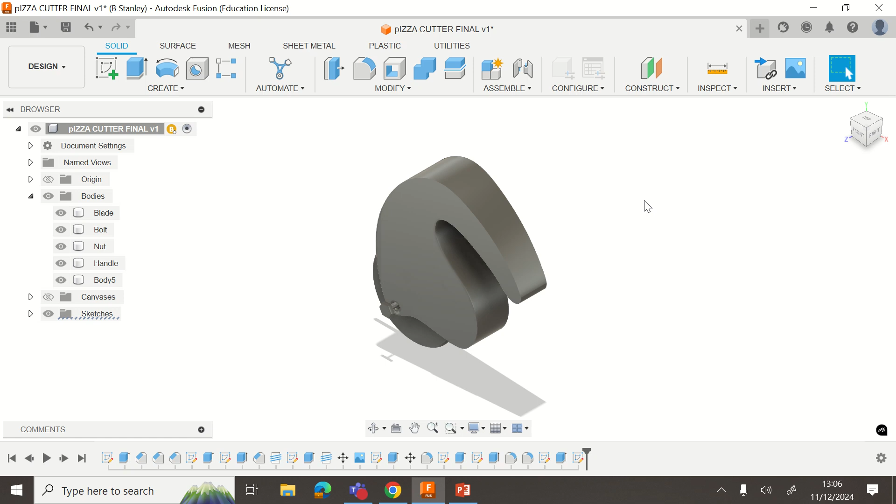In this video I'm going to show you how to insert a gap for the blade to be able to rotate round, as well as a technical drawing, exploded view and a render to the product.

As you can see at the minute, the blade would not rotate as it's inserted into the actual body. There's no gap like on our prototypes that would allow it to rotate round.

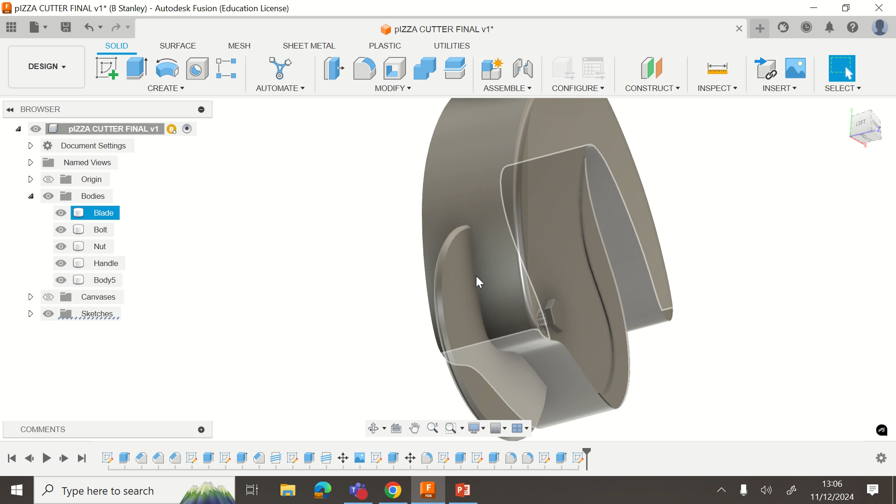So in order to create a gap, I'm going to click the front view, selecting that in the top right hand corner. Then I'm going to click create sketch, and select the surface I want to sketch onto.

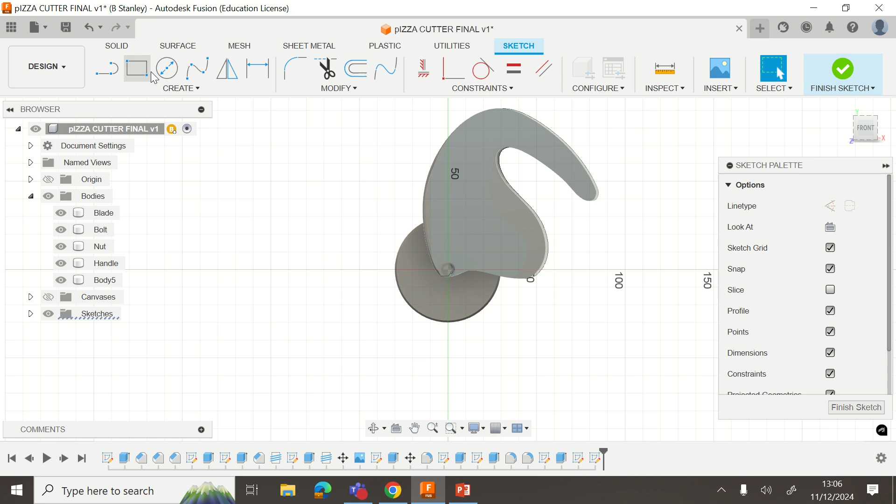With the circle tool, which either shows here or under create as circle, center diameter circle, you're going to select that middle section, shown by a target in the middle. I'm then going to select that, and make it slightly bigger than the blade.

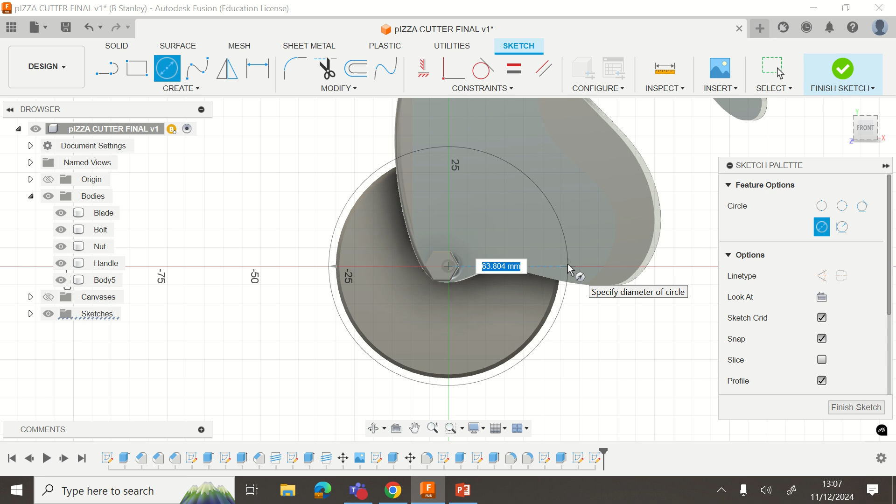It needs to be slightly bigger so that the blade can obviously rotate around it. So I'm going to click there, then click finish sketch, and return to a 3D view by clicking on the house at the top right.

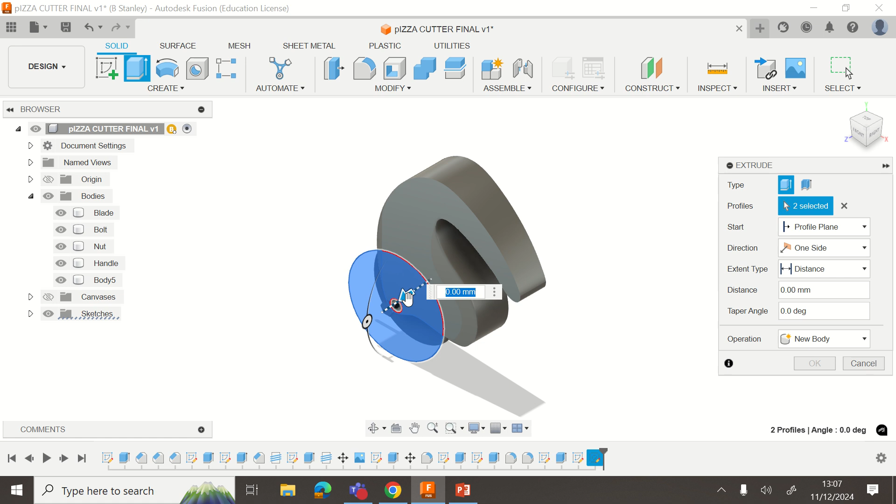Now I'm going to extrude this shape, so I'm going to click it, and click extrude at the top left. You'll notice that when I push through, it cuts everything out, and I don't actually want to do that.

I just want to cut part of the shape where the blade is. So I'm going to change this to two-sided view, so I've got control of both sides, so I can make this bigger or smaller.

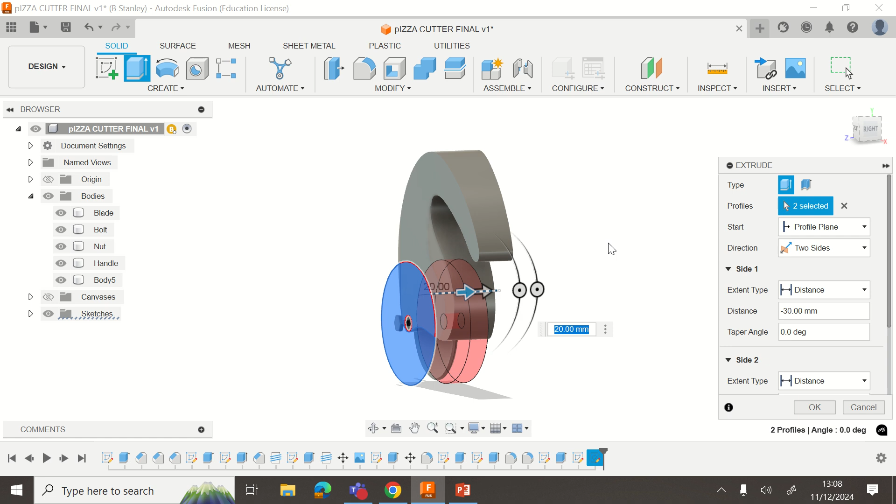You'll also notice that it's actually removed the blade. It thinks that we want to cut the blade as well, where we don't want to cut the blade, we literally just want to cut the body.

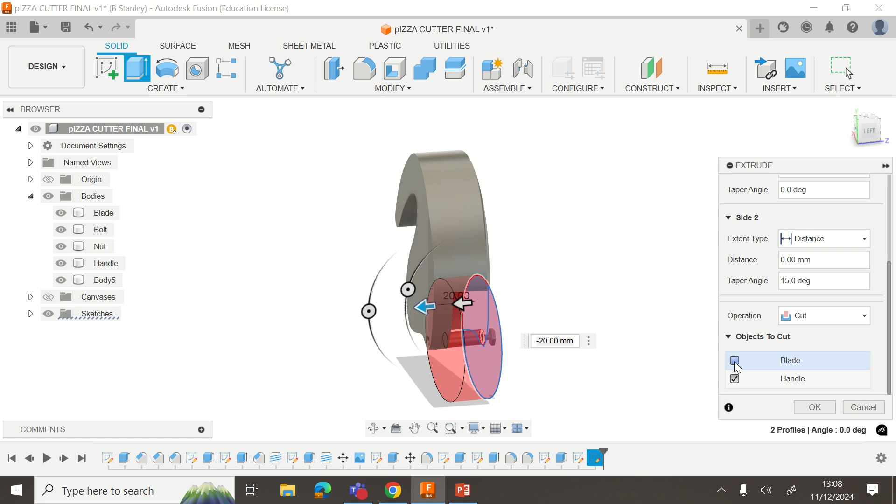So if you scroll down here, it will say objects to cut, and you don't want to select the blade, so you want to turn the blade off. You literally just want the handle to be ticked, meaning the handle is the only thing it will cut through.

Now I can adjust this so that there is a gap big enough, and you can see from the red markings roughly that there's a gap so the blade can rotate round. And then I'm going to click OK.

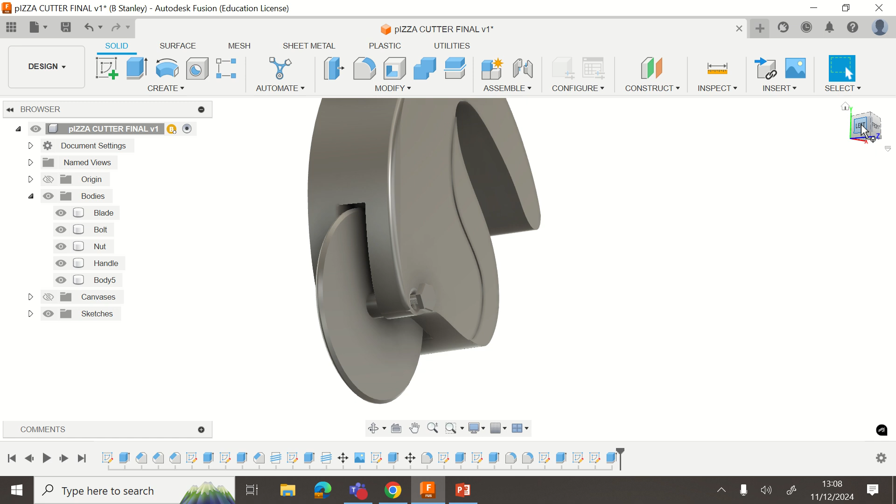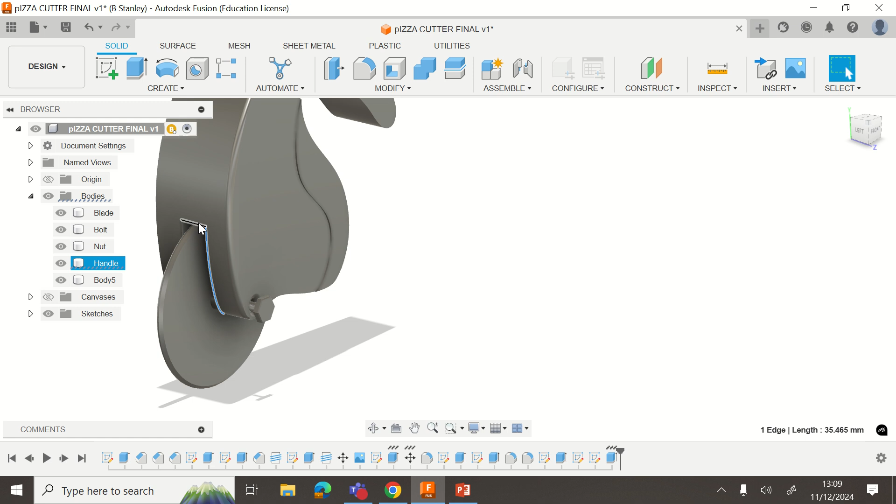Now you'll also notice that there is this section here which we can remove later on, so don't worry about that at this point. Now if you wanted to go in and fillet these edges to make them slightly more curved, you can do that, or you can just leave as is.

The next step is, as you can see here, I've got this rubber kind of grip that I'll add later on, and I also want to add the same onto the other side. So I'm going to turn the canvas back on, and flip it round to the other side.

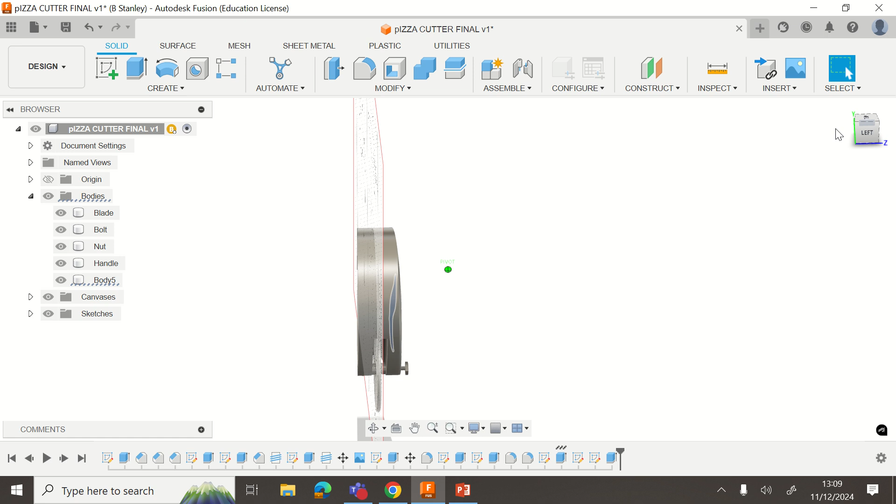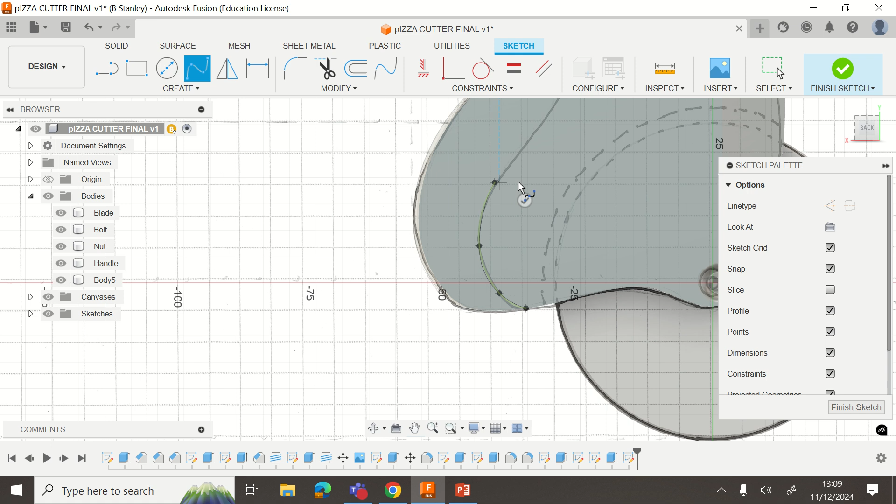By clicking that viewpoint, I'm going to click create sketch, and trace that detail you see there with the spline tool. So I'm going to select the spline tool, which is your dot to dot, and go dot to dot to dot, following the path I can see on my technical drawing.

Remember, if you're not happy with something or it goes slightly off, click the tick, and then you can continue from the last point until you're happy with it. Then I'm going to click finish sketch.

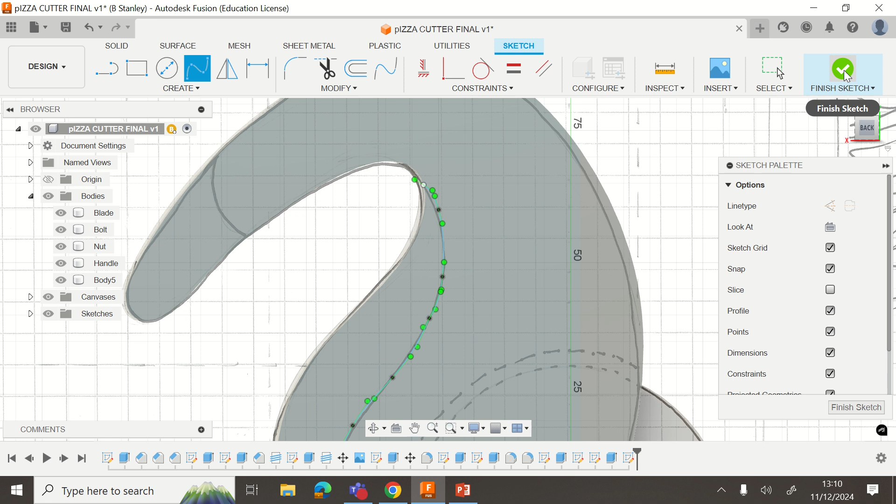Change it so it's slightly 3D. You could click the house, but it will probably show you the other side instead. And then we're going to select that surface and extrude it. Now I'm pretty sure that on my other side I did it either 0.2 or 0.3. I'm just going to click 0.2 in this instance.

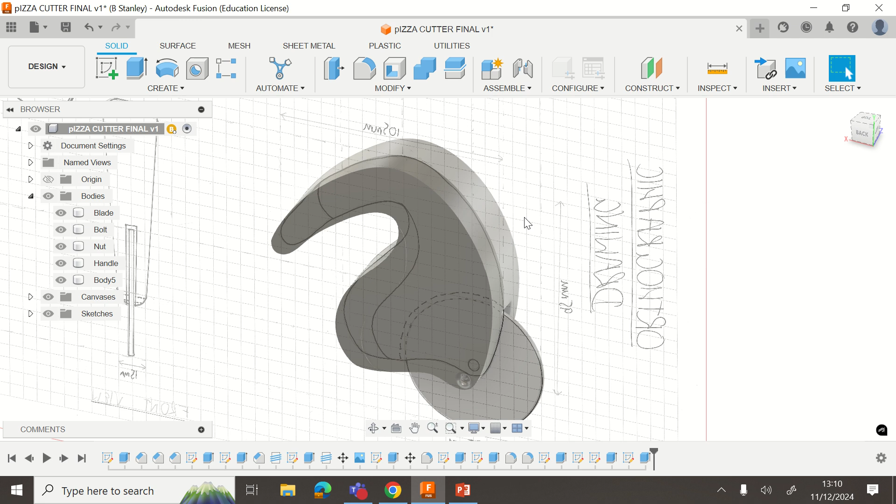I'm going to turn my canvas back on with the eye tool, and your object will then look like so. Now this bit shouldn't be here, this little section that's here.

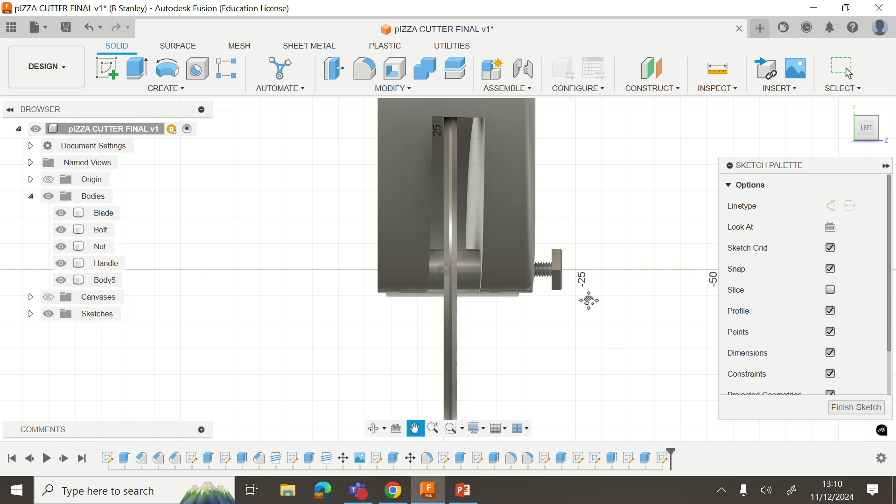Now to easily fix that, I click create sketch, I select this surface, and with the rectangle tool I'm literally going to draw a rectangle like so, which I will then extrude outwards to cut it. So I'm going to select this, click finish sketch, and then click extrude.

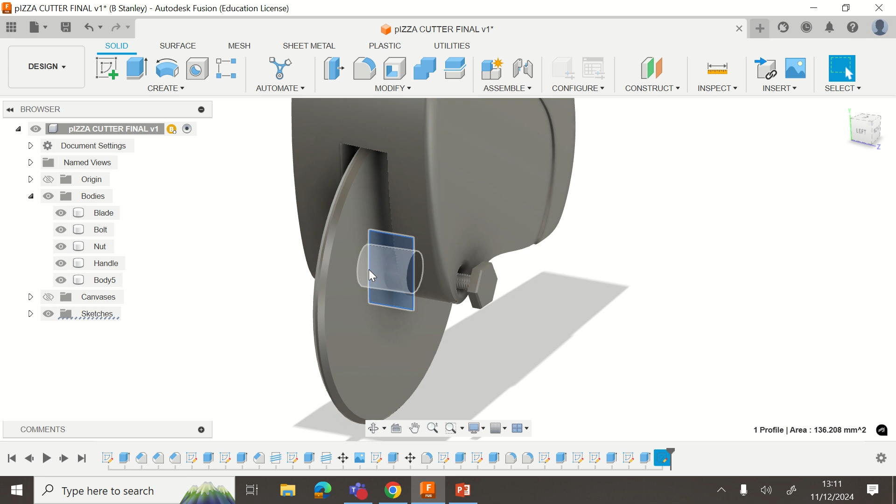And then I can cut it out. Now as you'll see again, it is trying to cut the blade, so I'm going to turn the blade off, turn the bolt off, and I just want it to get rid of that handle, that weird cylindrical shape showing on the handle.

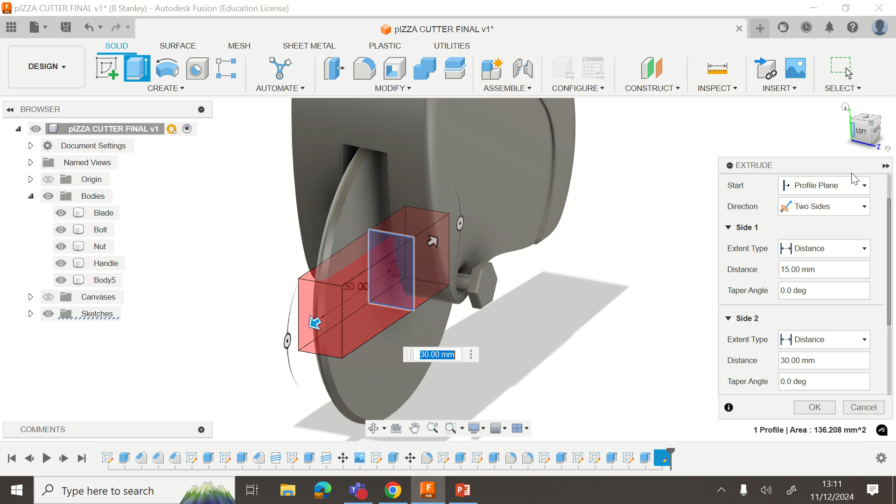And again, I make sure it's two-sided, so I've got control on both sides. Now when I check again, that looks pretty good to me, and then I click OK.

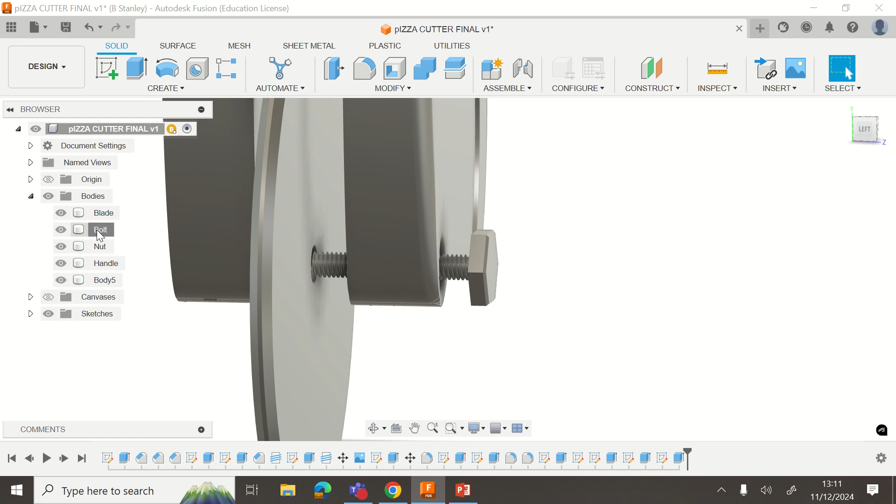Now what you'll notice is that the bolt is actually not long enough for my design, so I could do one of two things. The first thing I'm going to do is click on it over here so it's highlighted in blue, and I'm going to right click, move / copy.

I've then got enough control so that I can bring it over. That's not fully touching, so I'm going to make it -3.1. Nope, it's -3.2. That's perfect.

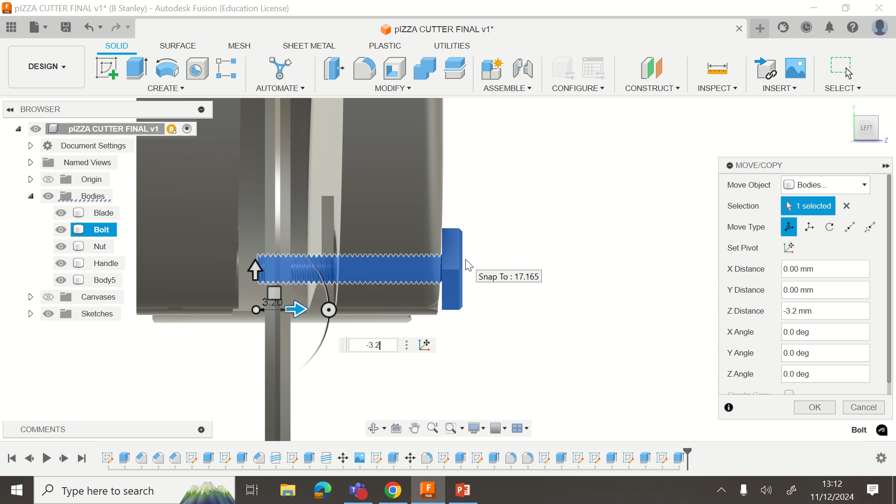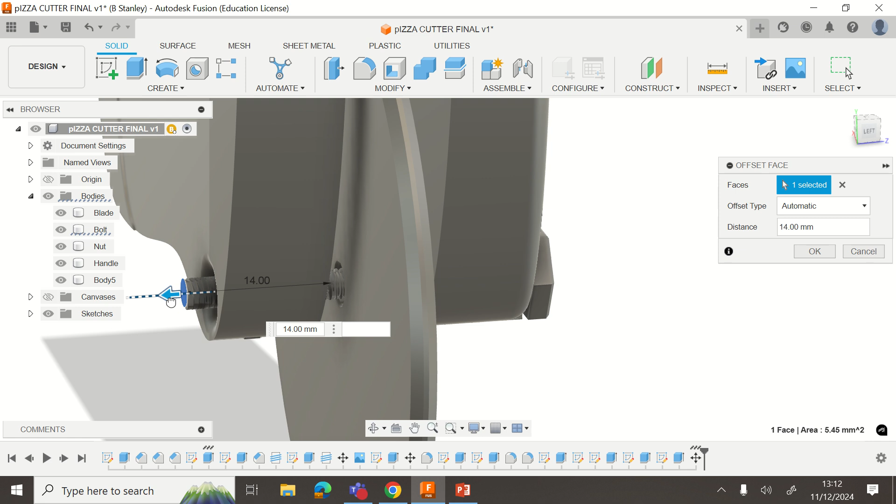Now you'll notice the bolt isn't big enough, so I should be able to select this face and right click, press and pull. What that will do is pull it out. It's slightly different to extrude because it will just continue with an already existing body. When I click extrude, it makes a new one, and we don't want that. We just want to continue with what already exists. Then I'm going to click OK.

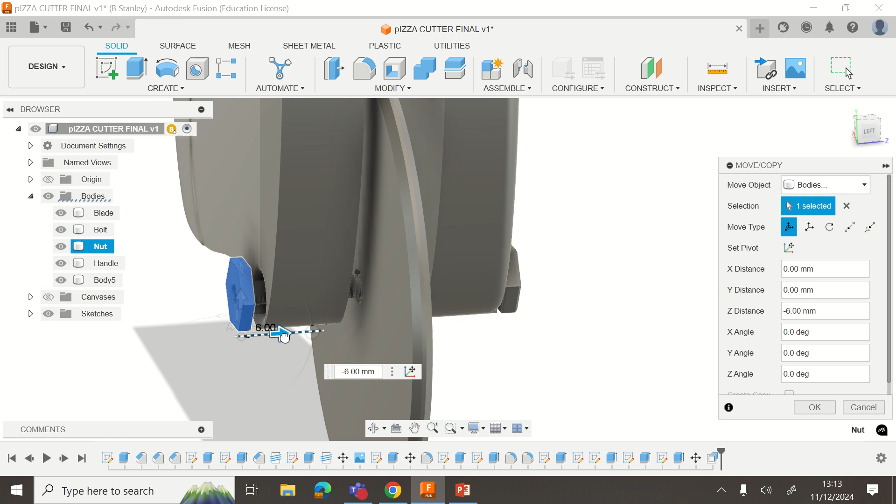Then you'll notice that the nut is actually hidden inside the handle, so I'm going to select it again. I'm going to right click, move / copy, and then drag it out so that it's attached to the actual bolt. I'm going to change the left view, and then change the measurements.

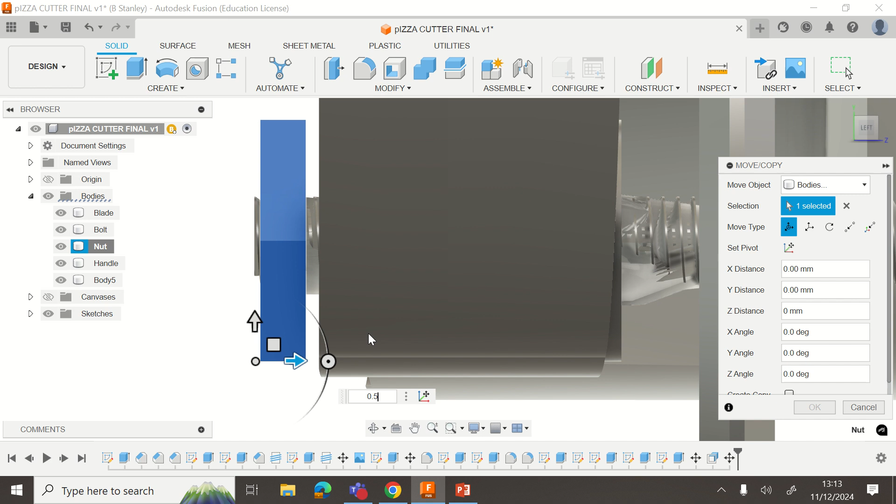Do it again, so nut, right click, move / copy, it's up there, and then I'll have to drag it this way because it was slightly too far. So I'm going to do 0.8, nope, 0.5, no, 0.3, that's about right, and click enter. Perfect. What you should end up with is a fully attached pizza cutter like so.

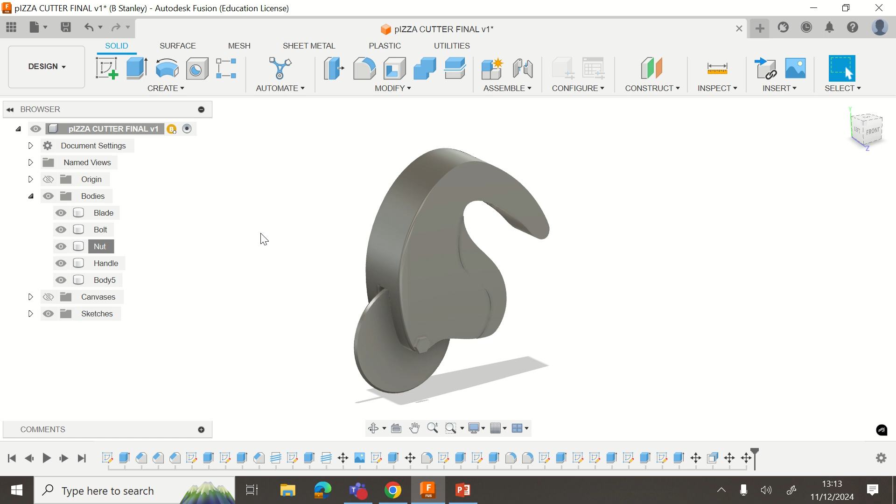There, what I'm going to do is go to render, so I'll click design, render. I'm going to get rid of that bit because I don't need to see it. I'm going to click the colour wheel, and then under Fusion appearances I'm going to select the material that I'd like.

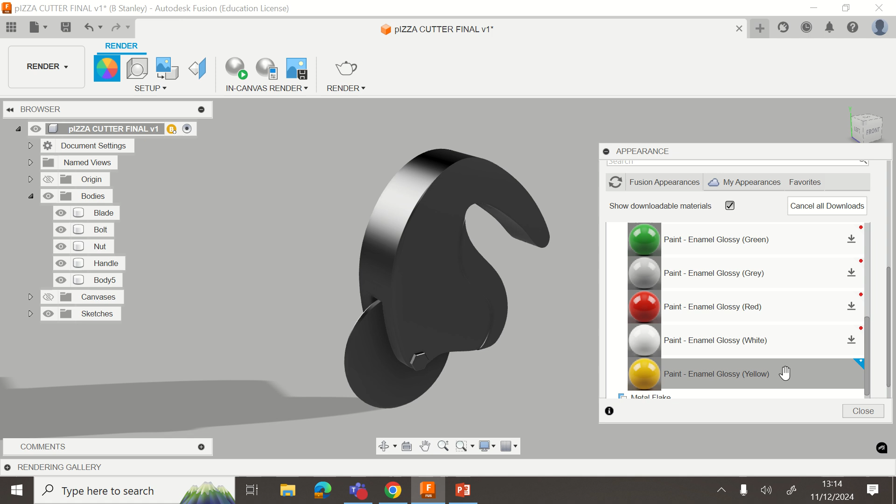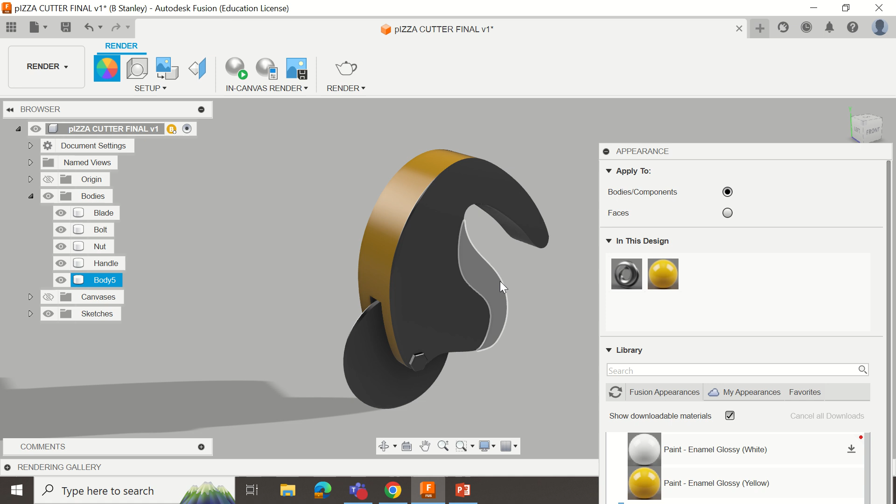So I'm going to go paint, enamel glossy. I'm going to get this one, just see what that's like, and start to drag it across. Now remember, if you want to select certain parts, for example you might just want that strip to be that colour, just click cancel, try again, then drag it to that section and it will just make that part whatever colour you want it to be.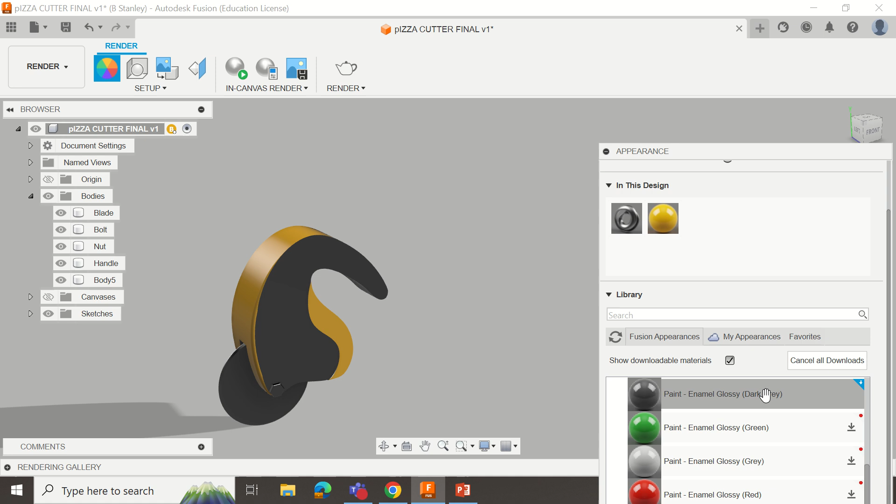So I'm going to zoom in again. Even the edges can be different colours if you wish them to be. It is slightly temperamental depending on how good your computer is. I might do dark grey. I'm going to select this bit now, drag this over, and then this little bit as well, drag that over like so. Now for the blade, obviously you want to make it stainless steel, aluminium, any kind of metal really.

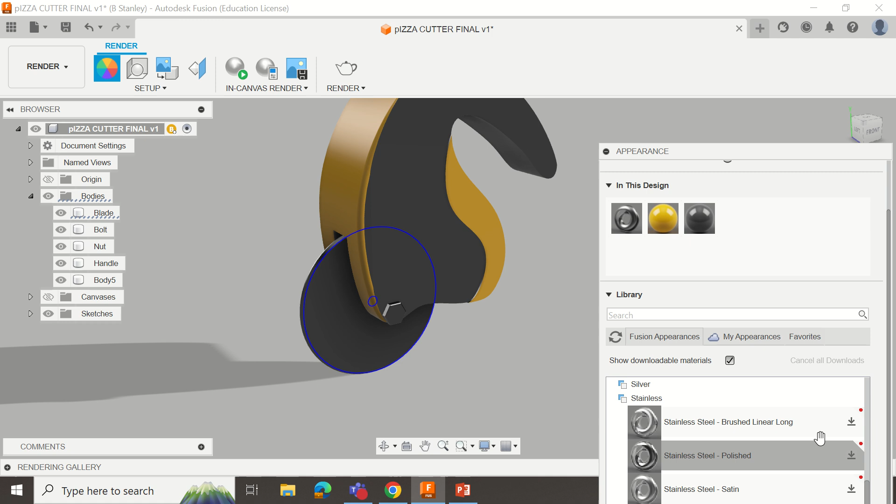So I'm just going to go aluminium. If you want to play around with the colours, you can. I'm going to go cast aluminium. Let's try that. I would like a shiny one really, but have they got aluminium? Stainless steel, there we go. Download that and then drag it over to your actual blade.

Remove it, do it again. The reason it came up as that is because it just thought I wanted that part, and I didn't - I wanted the whole thing to be that. You might want it polished. I might change that, so if I right click, unassign and delete, and then drag it over again - polished one's better.

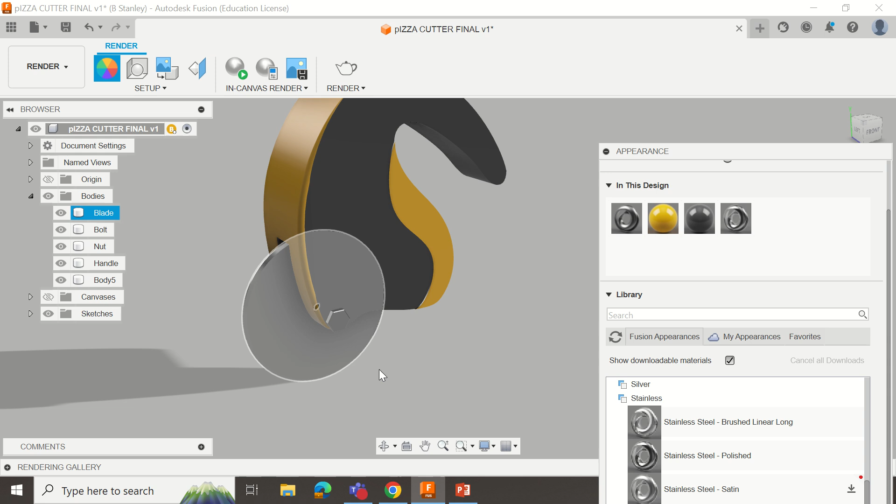Now if you weren't happy with the colour of yellow, if you right click edit, then you can play around with some of the colours that are there instead, and then click done. So if I pretend I've rendered all of it, I then click play, and then you'll notice that it will start to render.

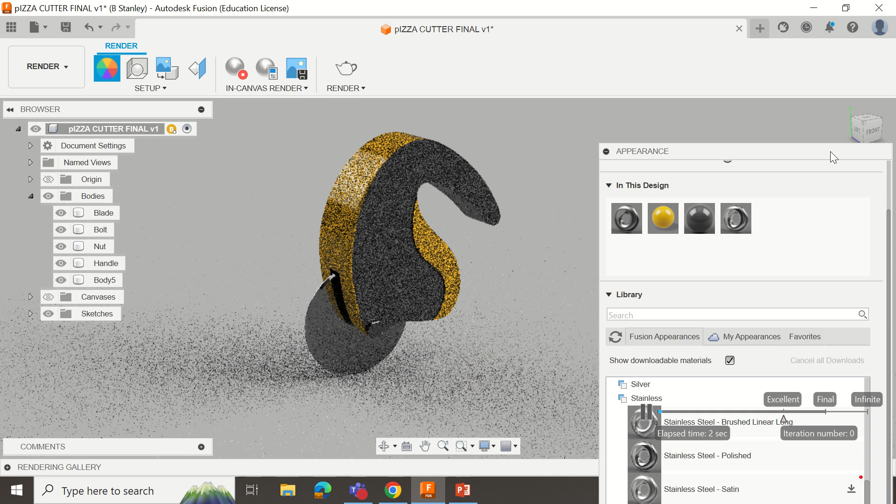Now if you wanted to add a sticker here, let's say for example I was sponsored by Stanley, then I would get this picture, but this picture does have a background, so I need to write 'Stanley logo PNG'. That one still has a background, that one doesn't. I'd then save image as, save it in my area, and go back onto Autodesk. You'll notice it's starting to render.

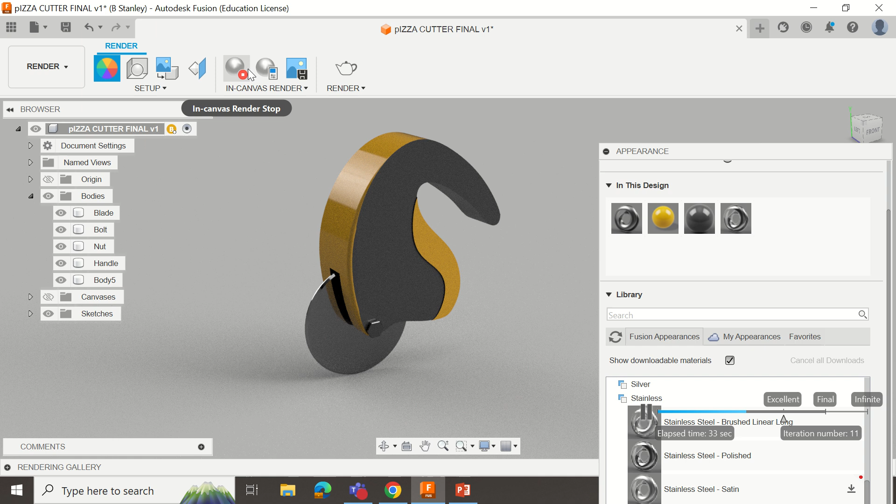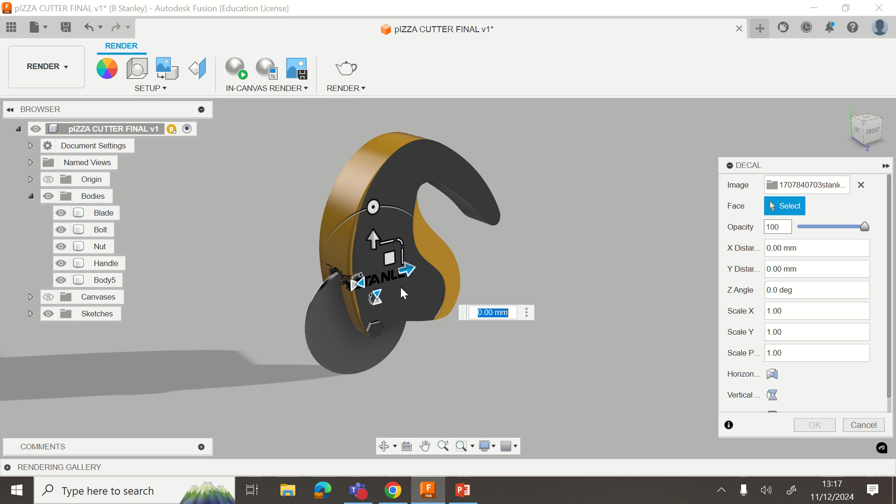I'll stop the render, then click decal, which is at the top, insert from my computer. I then click quick access, or you go and find the file, it will be somewhere. Then I click open and it will ask you where you want to place it, so I'm just going to drag that.

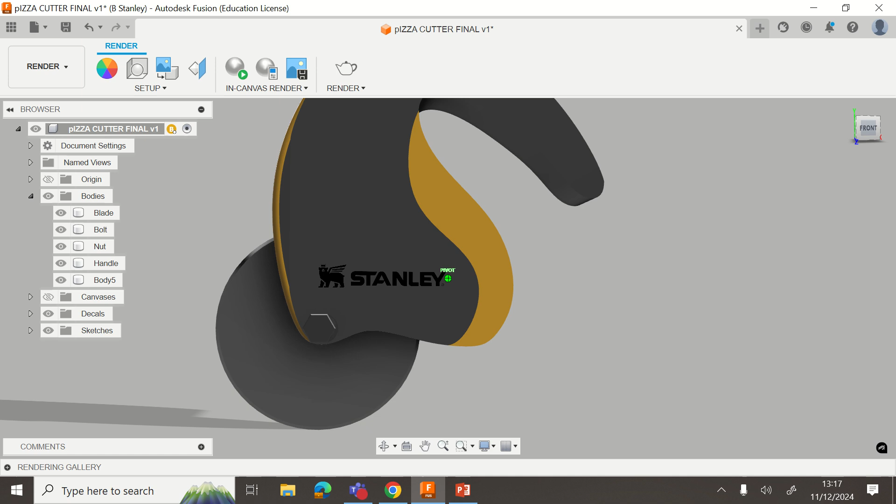Obviously you guys can play around with it a little bit more. You can also adjust the sizing of it if you wanted to, and the positioning as well. So I'm just going to click OK, and likewise I would do it on the other side as well, so I'd kind of mirror it so it's got the same effect on the other side.

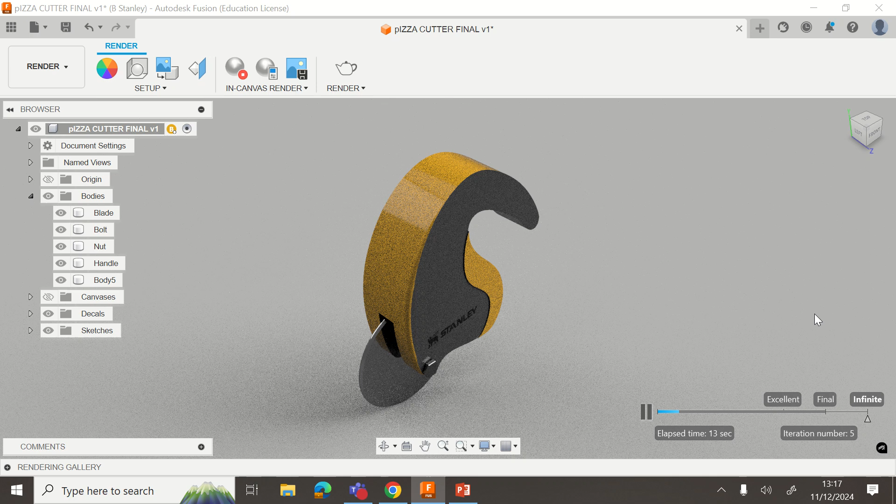Now once this is fully rendered, so I want it that way, I'd then print screen it, put it onto PowerPoint, and then adjust this little arrow that's here to infinite so that you've got the best quality CAD model. You do have to wait a little bit, so most of them will take 3 minutes, 4 minutes, depending on how long it is necessary in order for it to be a full 3D model that is fully rendered.

Likewise, if you wanted to add a pizza in there as well for the effect, you could get a pizza picture as a PNG without a background, put it onto PowerPoint, and then insert this pizza cutter onto the top of it as well.